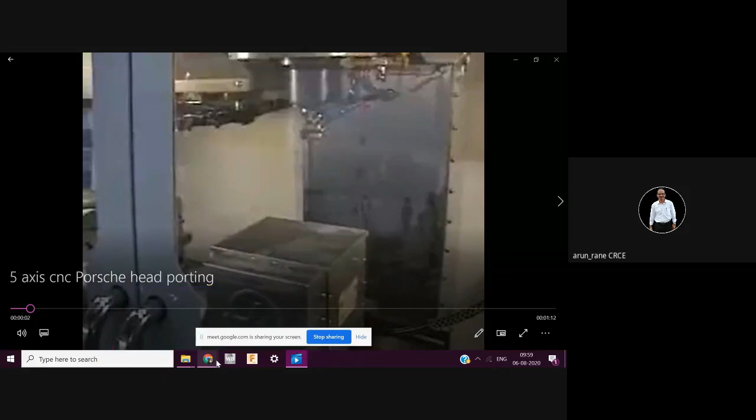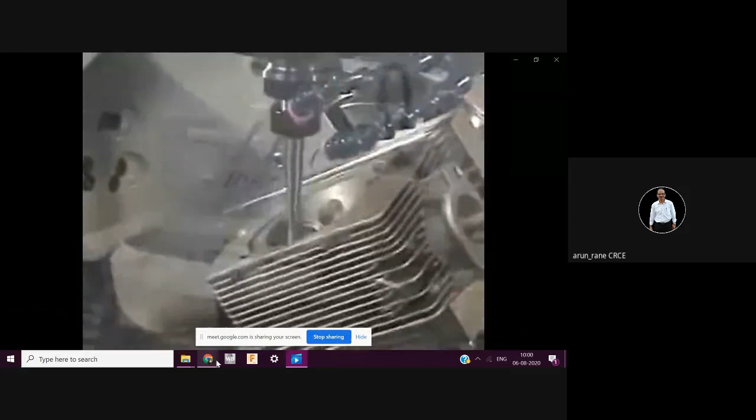This was the automatic tool changer. This is 5 axis machining again. The cylinder head being machined.

This is a long cutter. This cutter is called the bull nose cutter.

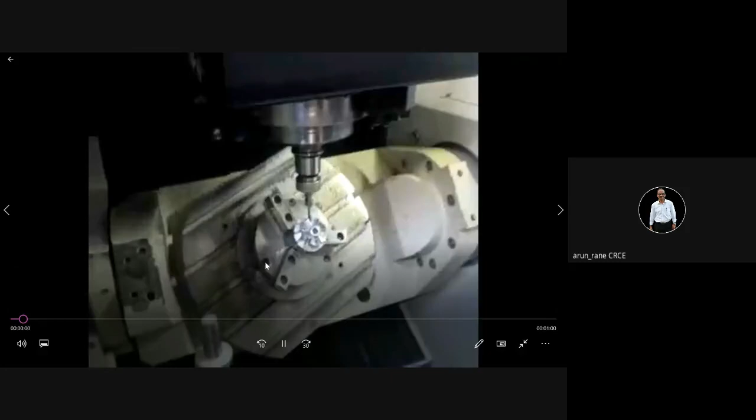I'll show one more video. This is again a 5 axis machining. So that was a kind of an impeller.

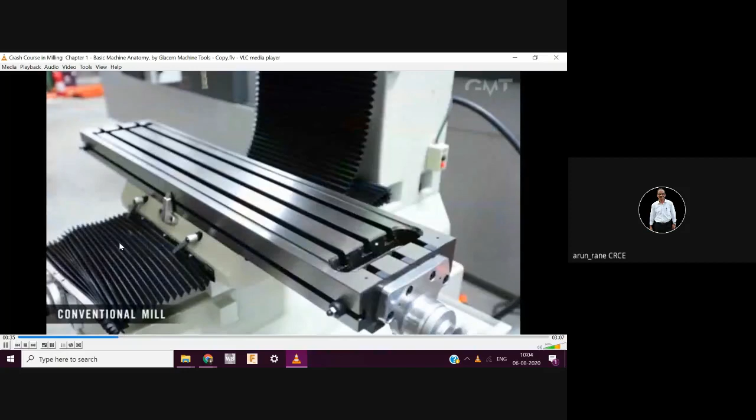See, this is how the workpiece is clamped in the vise. Now three components have been loaded on the machine table. The axis which is parallel to the spindle is the Z axis. This is what your telescopic covers are, made out of rubber just to protect the guideways.

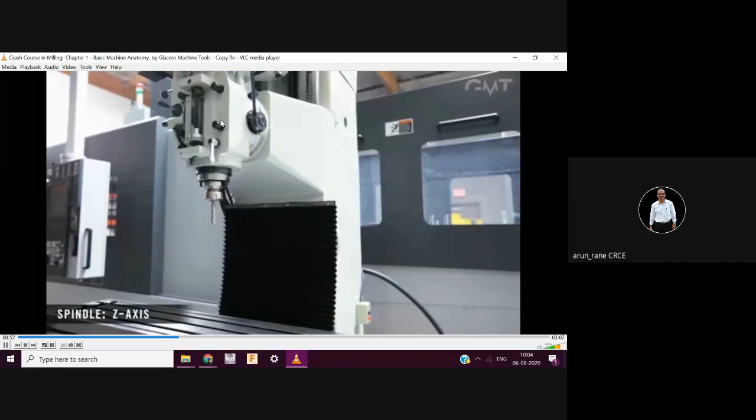The chips will not go inside and it will not damage your slides. The axis which is parallel to the spindle is called the Z axis. This is a 4 flute cutter.

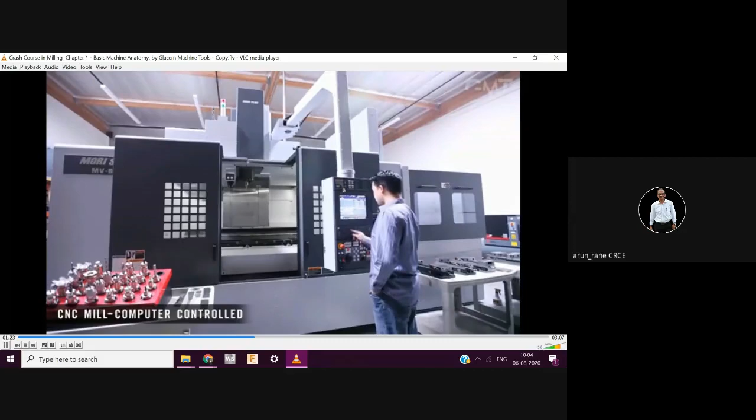This is called the quill. There is a provision that the quill can be handled manually. These are the different tools. This operation is called the face milling operation.

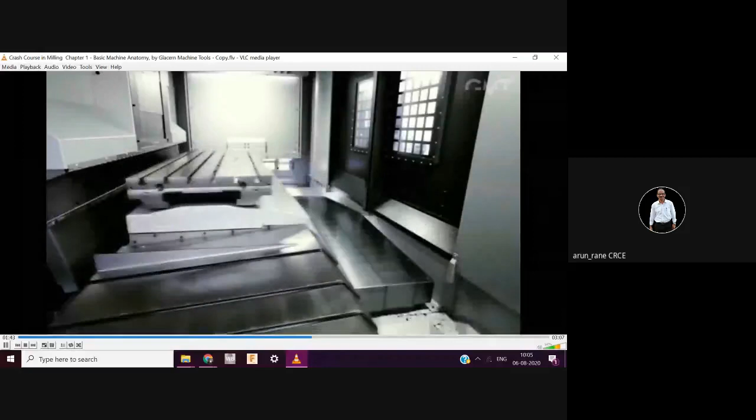The telescopic covers can be made up of rubber as well as sheet metal. These are the linear motion guideways, also called LM guideways or linear motion guideways.

And this is your ball screw and nut. See how free this is - this is for the stick free motion. That is, there is no sticking, so that's why it is called the stick free motion.

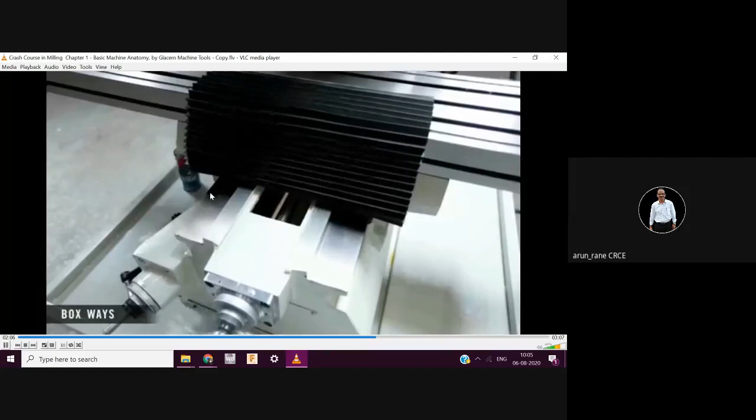These are the servo motors used nowadays. Acme lead screws are not used on CNC machines - it is always a ball screw. But since this is a retrofitted machine, you can see that Acme lead screw. It's always a ball screw and ball nut. Why is it a ball screw? Because the balls are fitted in between screw and nut, so that you get a frictionless motion.

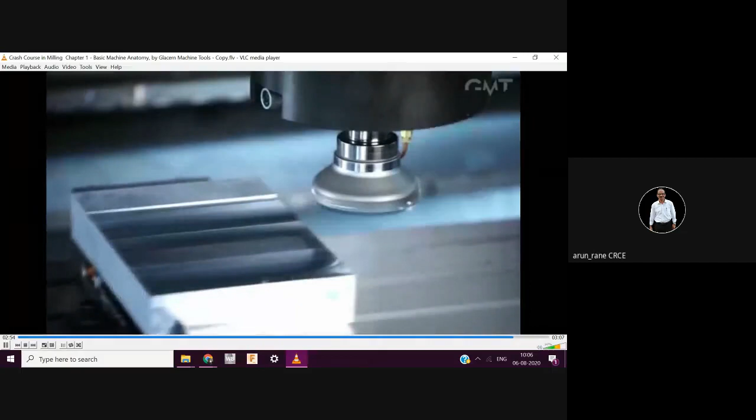This is face milling, and this is the face milling cutter. See how fast it is moving.

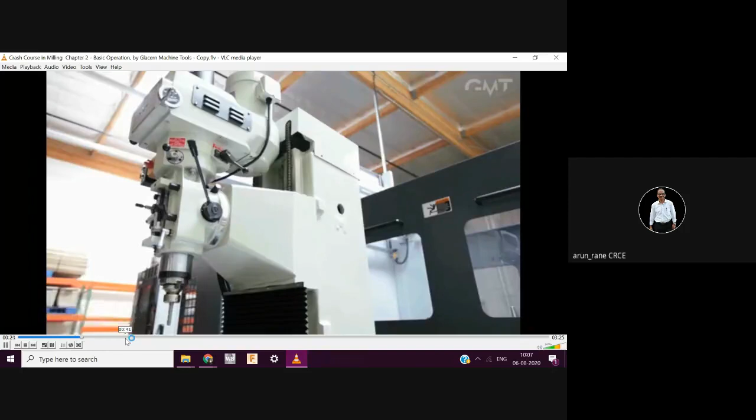These are the different tools. This is how it is fixed. We have draw bar, but nowadays in CNC it is all automatic. This is the manual clamping, which is never done on a CNC machine.

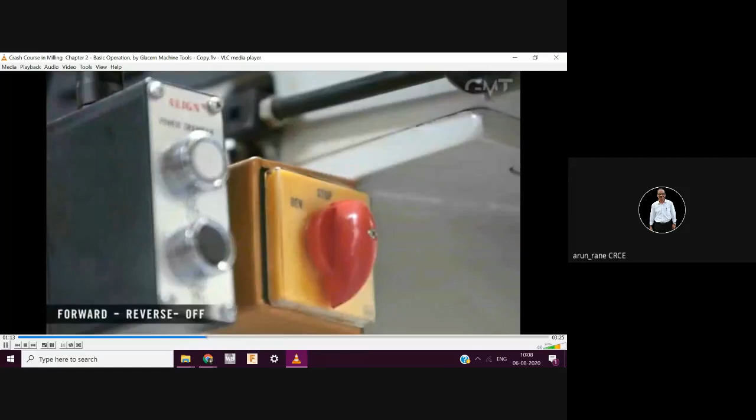This is a 4 flute end mill. The instant reversal - that is forward, then stopping and reversing - is very fast. So that's why we need to use servo motors.

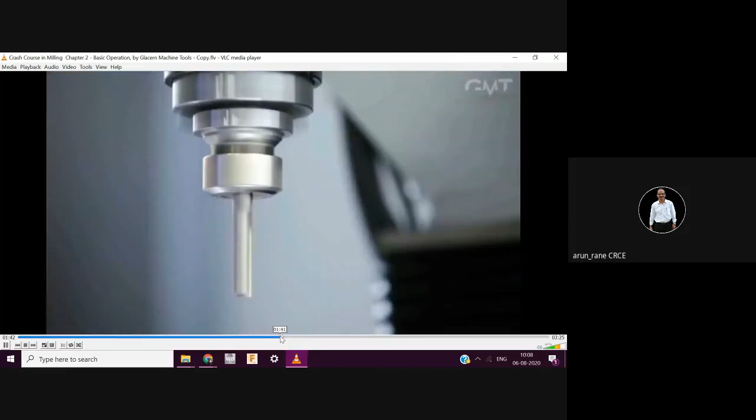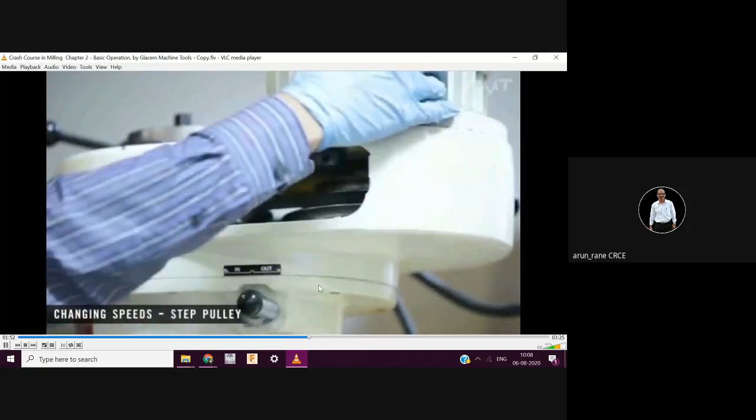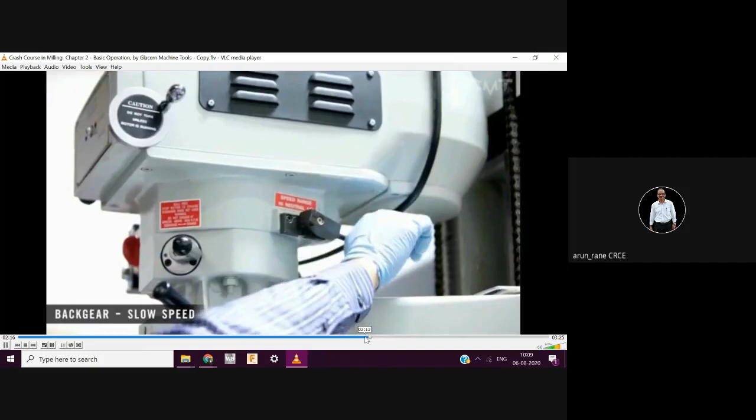Again, nobody uses step pulley in CNC machines. We use a positive infinitely variable gearbox, that is a PIV gearbox. This is manual changing of the gears, which is not part of a CNC.

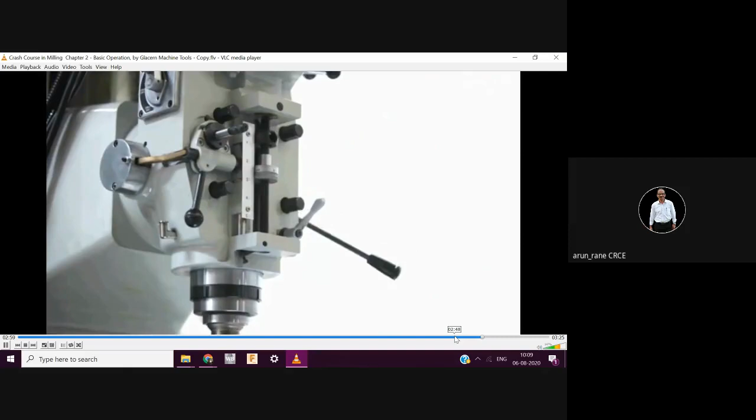This is the auto feed of the clutch for the quill. Of course, this was a manual operation.

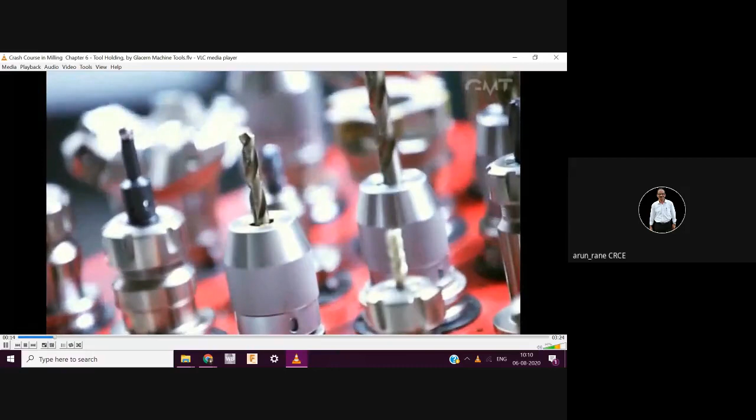So what are the different tools? Without tools, even if you invest 2 crores in the CNC machine, it's of no use. So you have to invest considerably in the tools also. These are the different tools - these are the drills, the coated drills.

These are the end mills. This is a slot cutter, a kind of an end mill. And these are your side lock cutters. These are your drill chucks. This is a drill chuck, which can be without key or with key. So this is the tooling.

You have to invest wisely in the tooling because it is the tool that is going to cut. These are the spindle adapters - usually BT40 or BT50, also called ISO 40 or ISO 50. This is a shank in which it is held, and this is the taper. So this taper should exactly match the machine spindle taper, so that your tool will run true.

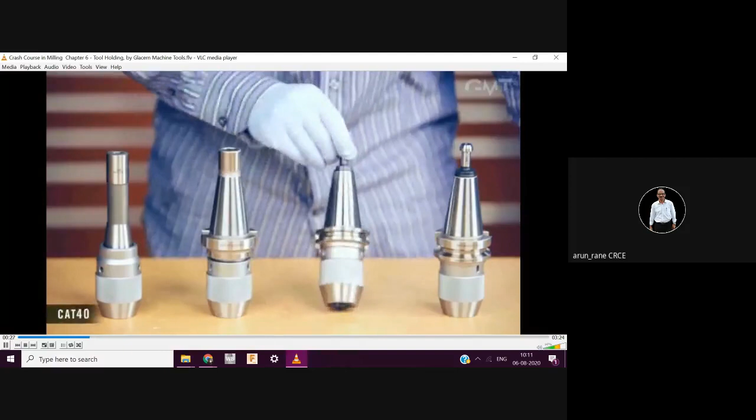This knurling is provided for closing and opening by hand. So these are also called keyless adapters - that is, a key is not required. Again, these are all accessories used for improving productivity.

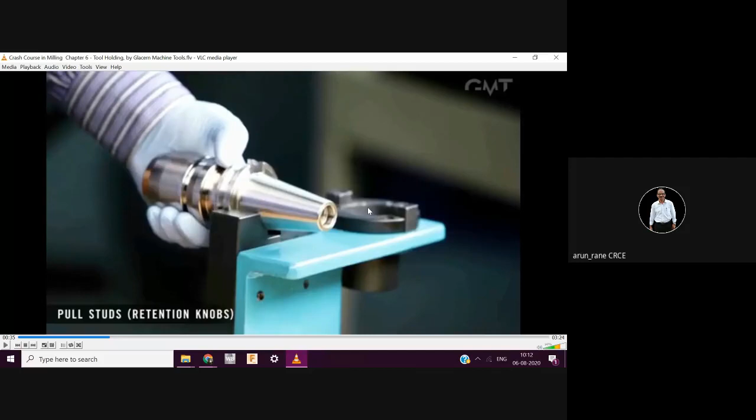So how to fix up the pull stud? This is the kind of picture to fix up the pull stud. This is for the pull stud - you are holding it, this is how a pull stud will look like. It is to be fixed in the spindle.

These are the face mill holders. I'll show it again - face mill holder. See, this is a face mill holder, that is, the face mill cutter is held here. This is the ground body in which the face mill cutter is mounted.

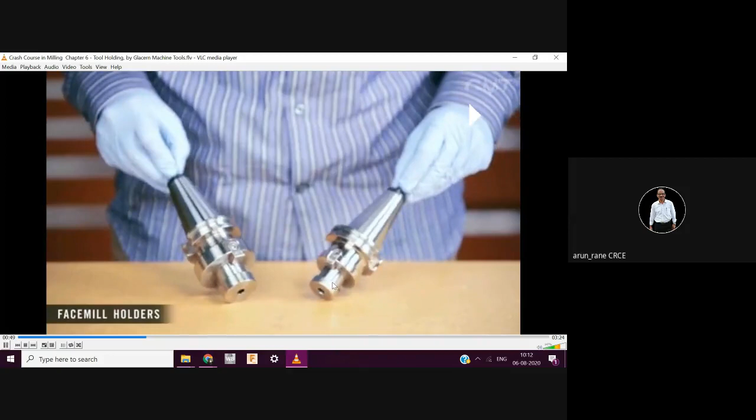So how to fix up the face mill cutter offline? Offline means you are not going to fix up the cutter on the machine. You have to fix up the cutter offline so that your machine productivity increases and your machining time is saved.

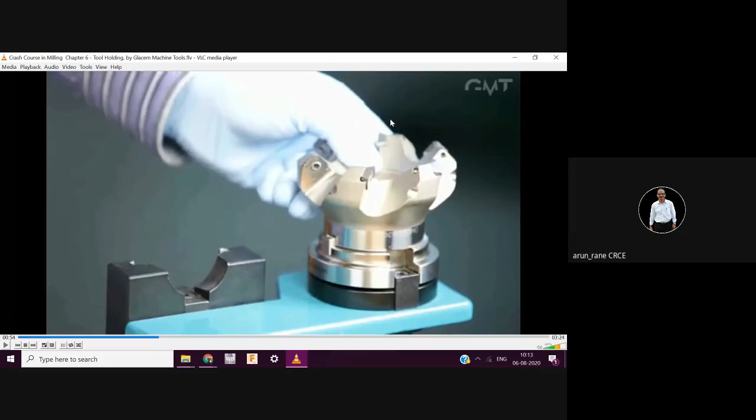These are called side lock holders. Side lock holders means you are holding or clamping from the side. This is a bolt, an Allen screw, which is used for clamping this end mill cutter, and this goes inside the machine spindle.

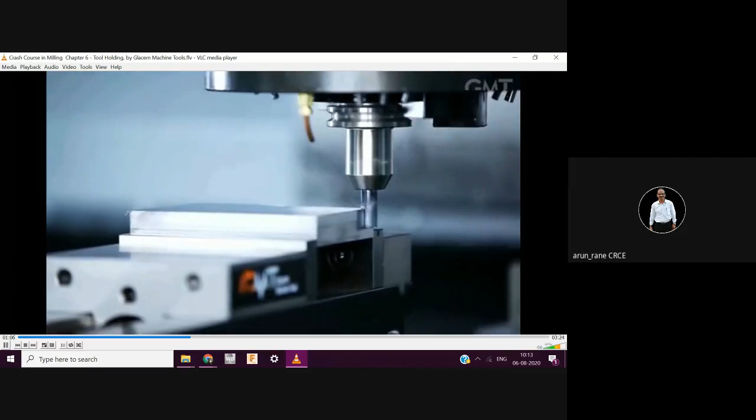This is interpolation, this operation is called interpolation. This is shoulder milling. This is a collet, the collet has a range of 1 millimeter to hold a cutter.

So all this tool setting, we are doing it offline. This is the spanner, a special spanner which is designed and manufactured just to tighten and loosen these collet holders.

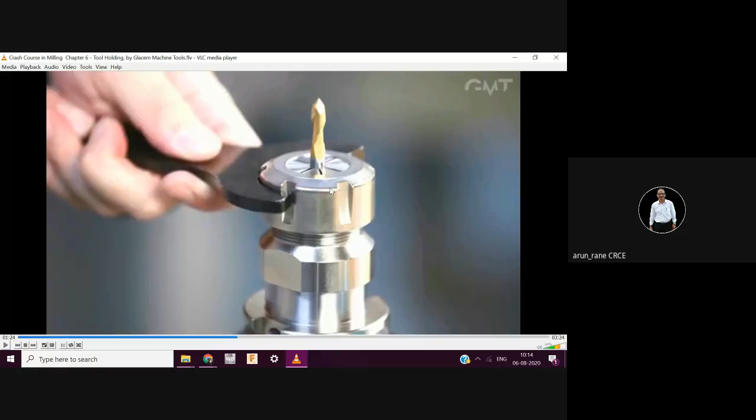That was a coated cutter, titanium carbide coated cutter. This is side milling, which is done with the help of the end mill. This is again a coated cutter, coating of carbide.

This is used for measuring the bore size, or this is also called the touch probe system, which is used for taking the offset. It can be used for measuring the bore also.

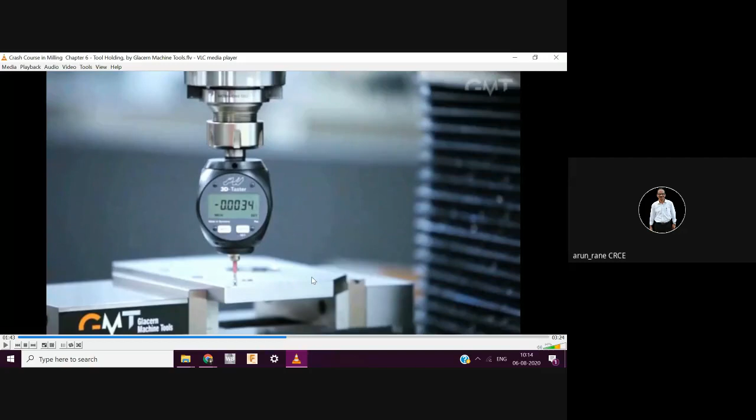So here now we are measuring the Z offset, that is with respect to my machine 0 point, that is Z0 point. Where is the tool face? Where is the job face? With respect to the machine 0 point, that is in the Z direction, where is the face of the workpiece located? The moment it touches, it gives the reading, and then the machine understands what is the height of the workpiece, where is my Z0.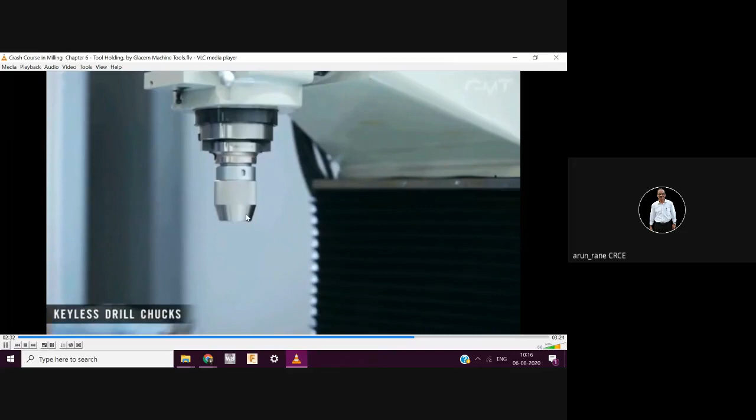See, it is a quick change, keyless drill chuck, so you can quickly mount the tools. Of course, nowadays you use tool changers, automatic tool changers, and pallet changers.

This is for peck drilling. Whenever the drill lengths are same, now this drill length is quite more, so you have to do the peck drilling, which is coded by G83 code, so that the chip should come out of the hole.

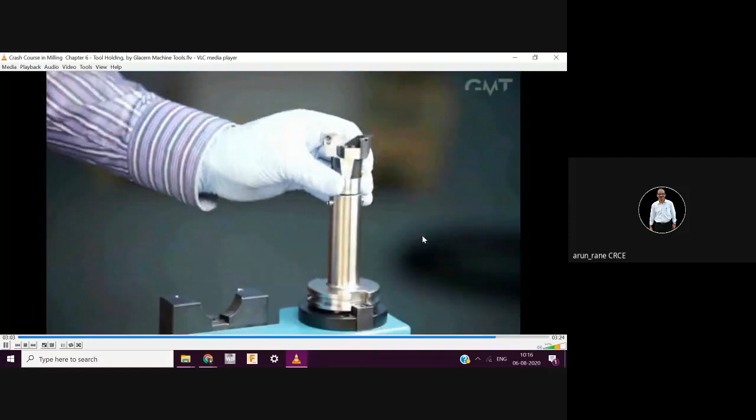This is chamfering operation or countersink. This is again a sort of end mill having inserts.

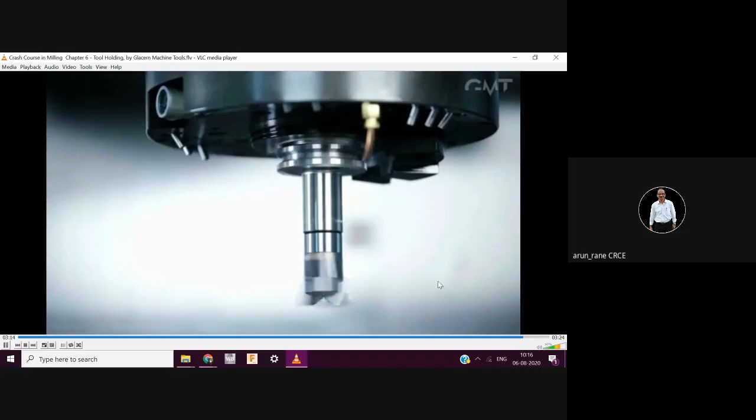Anybody waiting? Let me see. Still some students are joining.

Yes, Mr. Purohit, are you there? Hello? Hello? Purohit is not there? Yeah, Aditya, can you hear me? Aditya Sawant, hello, hello, yes sir. Yeah, you can, I can hear you, somebody messaged me that I'm not audible. What about Purohit, is he not there? Purohit, no, only, his name is... Sagar just joined and left, I think. Sagar Vandra. Sagar? Sagar Vandra, you joined early and left early also. So Neeraj, are you there? Neeraj Jain? Yes, I'm here. Yeah, some students they join and they leave. All right, we'll continue.

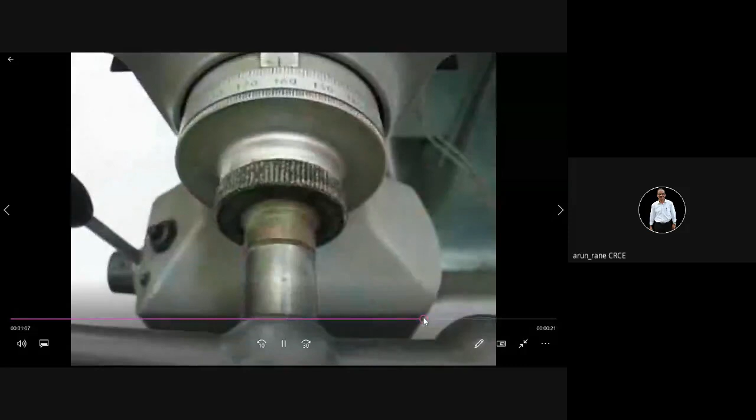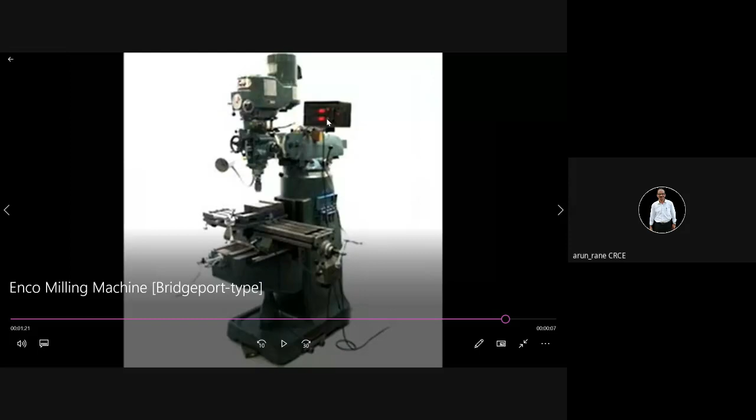DRO stands for digital readout. This is what digital readout is. There is no NC or CNC, it is done manually only, but you have a reading, so it is useful for doing drilling, reaming or tapping kind of operation where there are a number of holes, 4 holes, 5 holes, 10 holes, and when the pitch between the two holes is given, the DRO is convenient. But DRO is not an NC or a CNC machine, it's just giving an indication of where your tool is positioned, that's all.

These are the different operations I will show you one by one, which can be done on the milling machine.

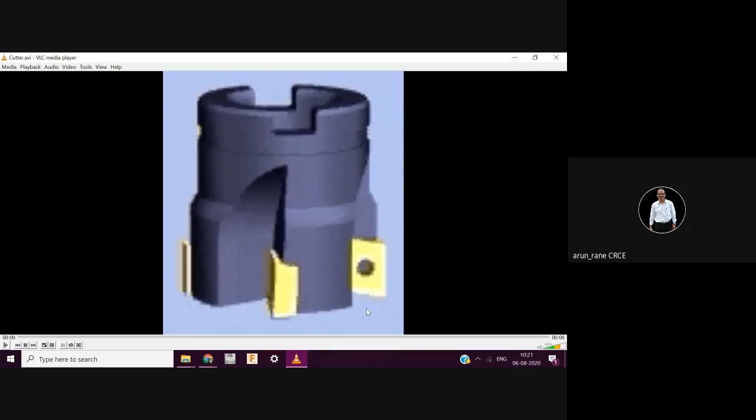So this is called the shoulder mill. Shoulder mill, shoulder mill, it has four inserts, so the productivity is more here with the help of this cutter.

This is for fixing in the spindle. This slot, what you can see, is used for fixing up in the spindle, as well as you have a bore also, which is ground.

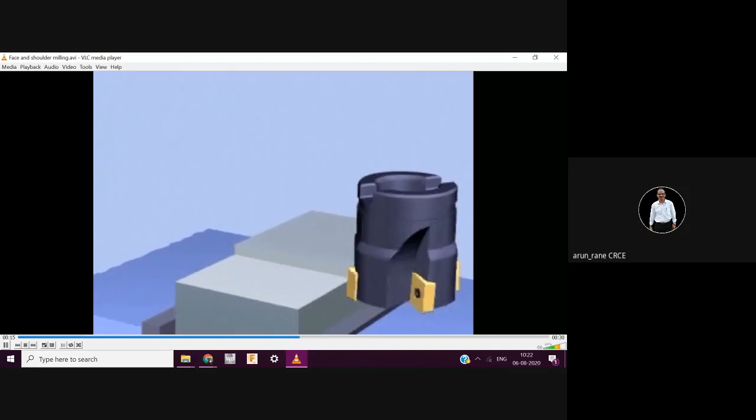This is a face and shoulder milling operation. Shoulder means this 90-degree face you can see - that is what is called the shoulder. Many times students are not aware what is face milling and what is shoulder milling, so that's why I'm showing this. Those who have practice are already aware of these different operations.

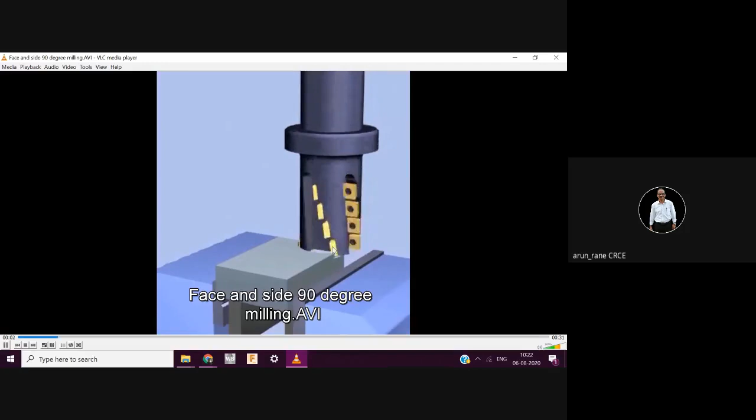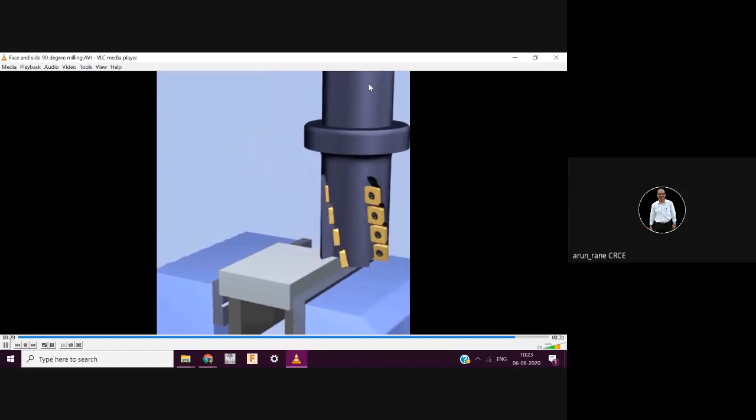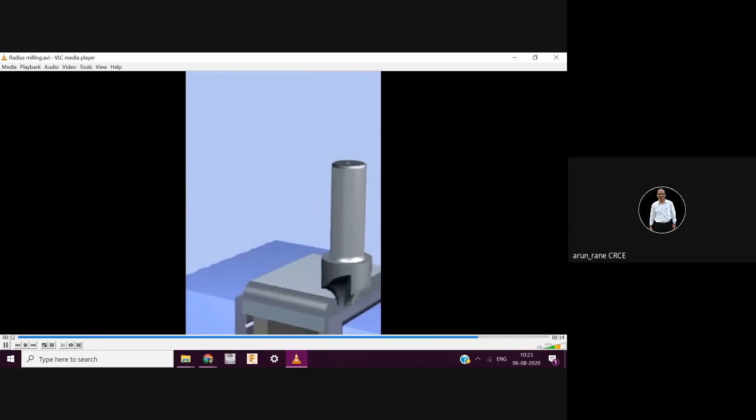This is again a stagger type cutter. You have almost 16 cutters. Whenever the depth of the shoulders is high and material removal rate needs to be more, you go for this type of cutter. It's a bit expensive because there are 16 inserts, each costing around 300, plus the holder costs around 6,000. But the returns are good, in terms of reduction in machining time. So you have to have a trade-off on how much to invest in the tools. If we have mass production type jobs, then definitely you need to invest in the tool.

This was the form milling, that is radius milling operation. The radius which is required on the workpiece has been ground on the tool. Again, if the quantity is more, then only we go for form milling cutters.

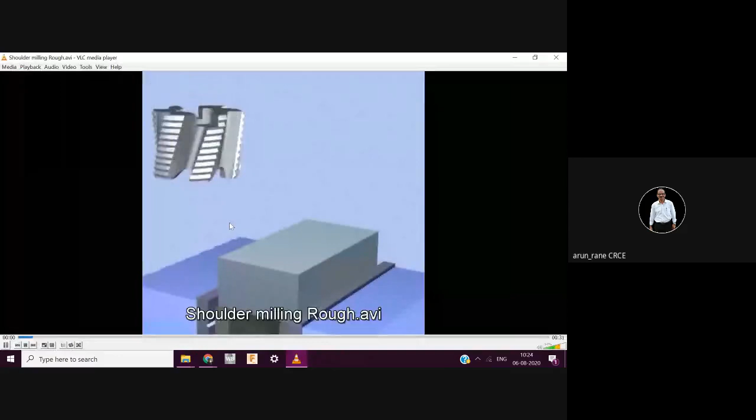This is called the shoulder mill, or it's also called the shell end mill. This is used for shoulder milling, but it's a rough milling operation. You'll see chatter marks or a rough surface, so this has to be followed by finish milling. The advantage is that the cutting is fast and the material removal rate is high.

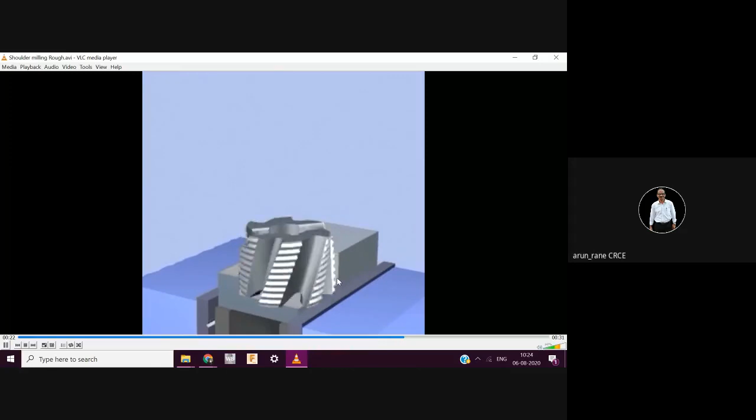Again, this is a solid cutter. Solid cutter means the tips are cut in the body itself, there are no inserts. This is done on a vertical milling machine - the spindle or arbor is vertical on which this cutter is mounted, and this is for the slitting cutter or slit milling operation.

This operation is for slit milling or even slot milling. The difference between slit and slot is that slot is wider, whereas slit is narrower. Slits are usually 3 mm and less than 3 mm, and if it is more than 3 mm, then we call it a slot.

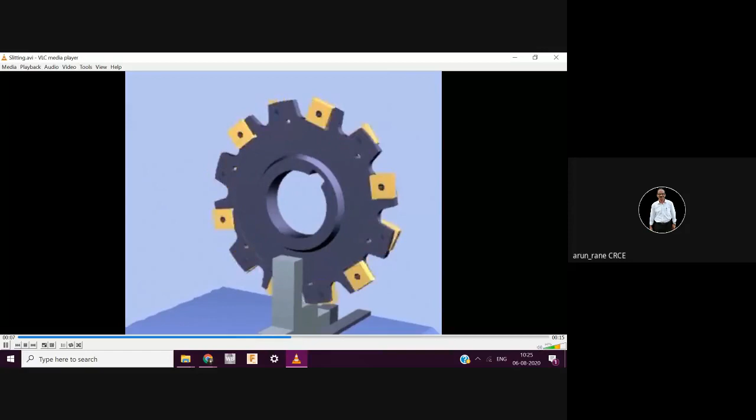This is a horizontal milling machine because the cutter arbor is horizontal - you have to look at the bore. This is slot milling, a 12 dia slot milling.

This is a coated cutter, carbide coated cutter. You can take the depth as long as you can see the flutes - your flute should not be covered up. And even if it is covered up, there should be provision to remove the chips, otherwise your cutter will break.

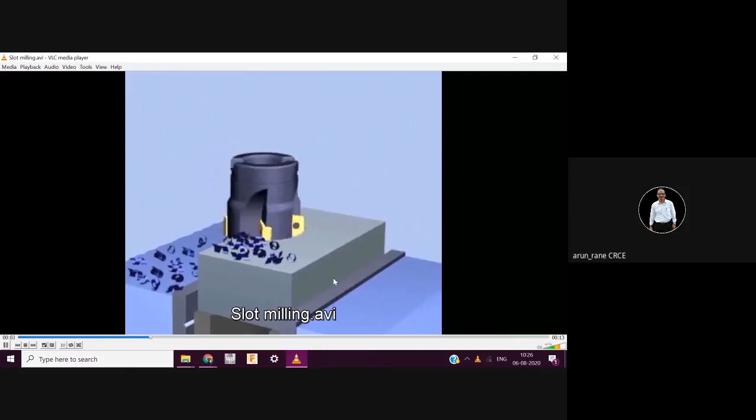Again, you have slot milling. As I said, you have to differentiate between slit and slot - slot is nothing but a kind of slit which is wide.

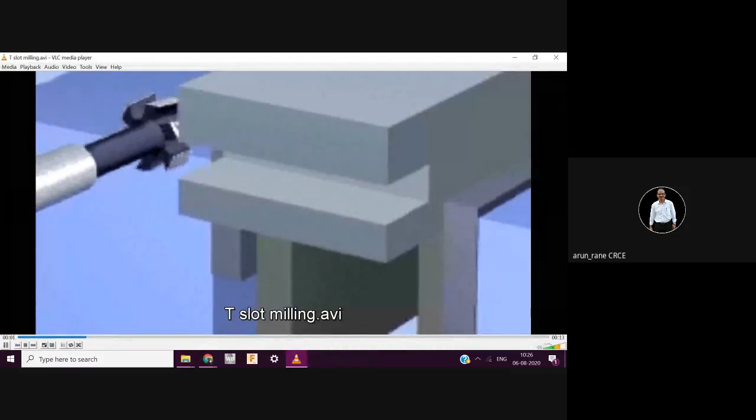This is a T-slot operation. T-slot - you must have seen on the tables such kind of T-slots, so you can insert the bolt. What is the purpose of T-slots? It doesn't rotate - the T-bolt doesn't rotate.

This is your angle milling cutter, a V milling cutter. We also call it a double angle milling cutter. You can have two angles simultaneously, or you can have just one angle.

Anybody wants to join? Let me see. Nobody. Nobody is in the waiting room. Nobody is in the lobby.

So let's start with the CNC programming.

There will be around 20 marks out of your 80 plus 20 plus 20, so out of your 140, 20 marks plus 20... so 30, out of 140, 30 and sometimes up to 40 marks are for the CNC program. How is it divided? One program for CNC lathe, one program for CNC milling - that's 10, 10, 20 - and then one program based on APT. If the workpiece is complex, then it can be 15, 15 plus 10, but minimum 30 marks will be there. How minimum 30 marks? 10 marks for CNC lathe program - I'm talking about the theory question paper - 10 marks for CNC milling program, and 10 marks for APT program. So like that, 30 marks minimum is the weightage for the CNC program.

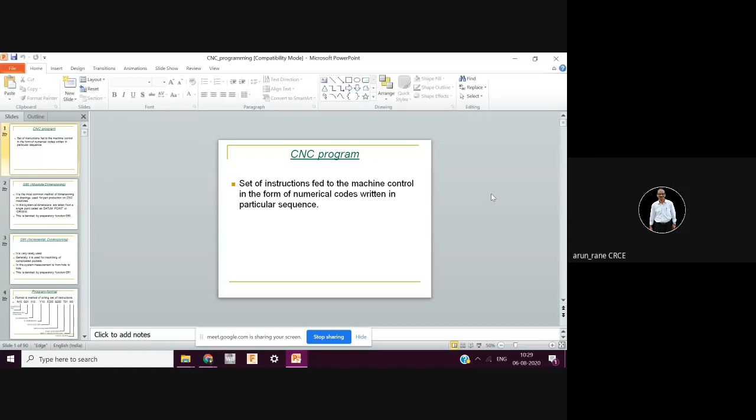So what do you mean by this CNC program? It's nothing but a set of instructions which is written in some high level language.

This is a set of instructions written in high level languages like English, which can be understood by the operator or the engineer. This high level language is converted into 1010, that is machine language, and that is called binary calculation. This 1010 is nothing but machine language, which is the on-off signal: one for high, zero for low, one for on, zero for off.

These are low voltage signals, and these are amplified. The amplified signal, from say 10 volts to 230 volts or 420 volts, is given to the respective servo motor, and the servo motor runs. This is how it works.

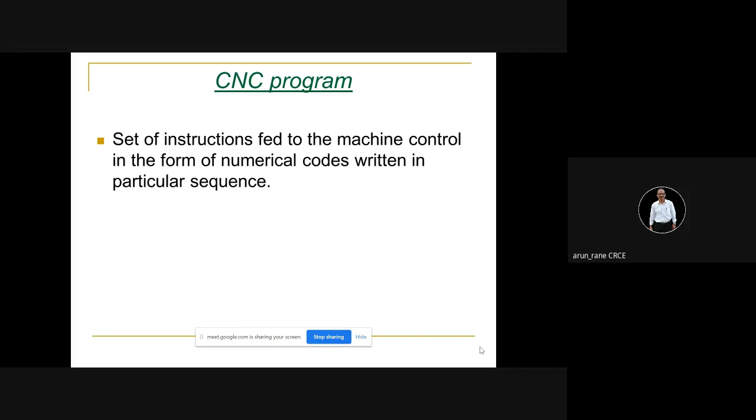The codes used in the CNC program are called preparatory codes, because these codes have a dedicated function. Like if you use G90, it means absolute. If you use G91, it means incremental. So this is the first code you should learn, that is G90, which is for absolute dimensioning.

I already briefed you many times: the dimensions on the drawings are given with respect to one reference point or one fixed point. That is what is called absolute dimensioning. So depending upon the drawing you receive, you have to use the appropriate code.

If the dimensions are given with respect to the previous point, then you have to go for G91, that is for incremental programming. So you have to take a decision accordingly, whether to go for G90 or G91. That totally depends upon the drawing.

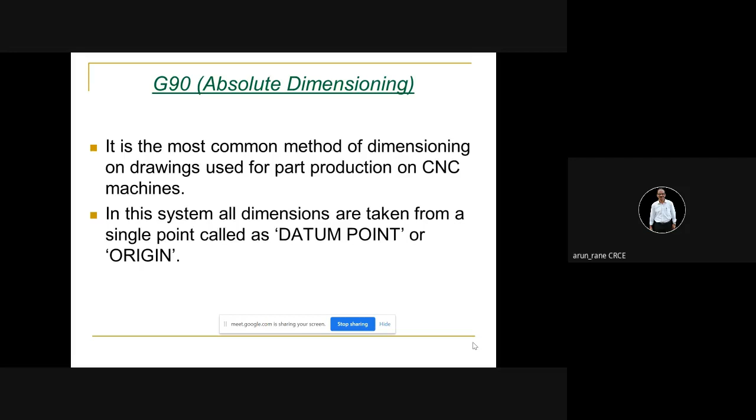All the dimensions are taken from a single point, called the datum point, also called the origin, the reference point, the program zero point, or sometimes the workpiece zero point. There is a small difference: the fixed zero point generally refers to the machine reference point. The program zero point is the reference point taken by the programmer on the workpiece. The workpiece zero point is when you use a touch probe system to take a reference point on the workpiece, so it can be same or different.

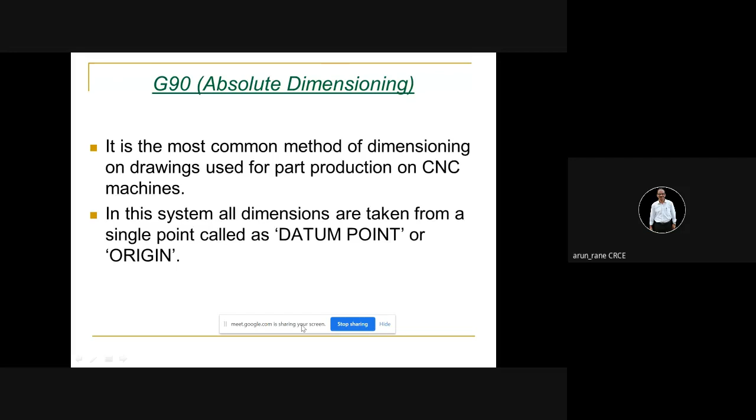G91 is not commonly used, and generally it is used for repetitive tasks. G91 incremental dimension is when the dimensions are given with respect to the previous point, so it is called incremental dimensioning, and the code used is G91.

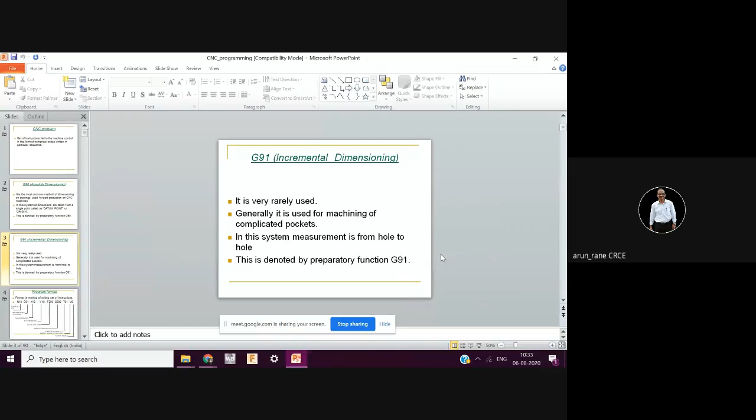So how is the format of the program? The format is how you write the set of instructions; you have to follow a particular protocol. This entire thing is called a block.

The block is identified by a character called the end of block, which is missing here, not shown here. This is because the end of block is represented differently on different controls. For example, if I am using a FANUC control, I use a dot or a full stop.

If I am using a Siemens control, then I use a star, also called an asterisk. So a star or asterisk means the block is completed.

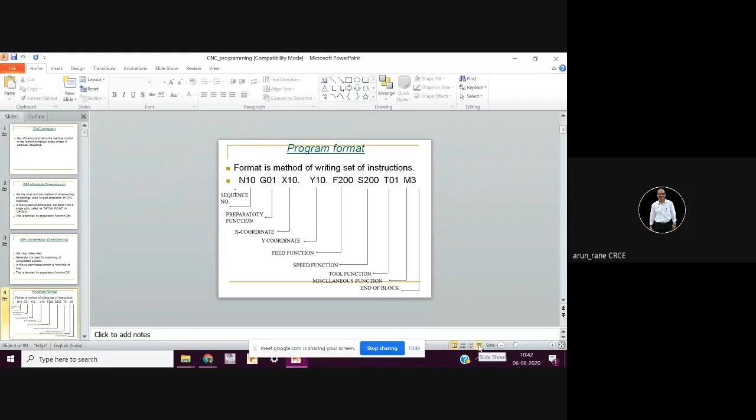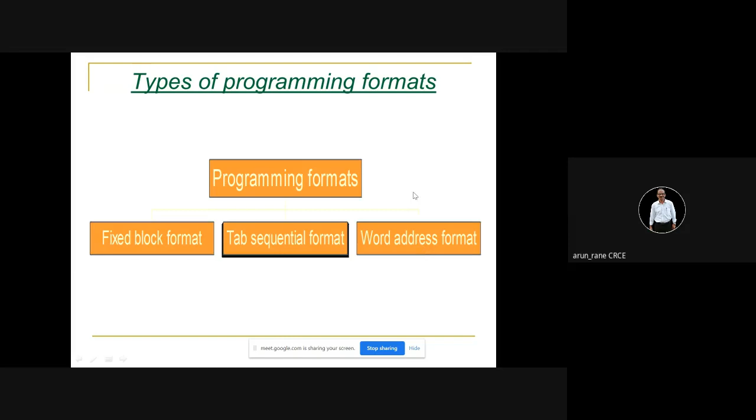Format is nothing but a method of writing a set of instructions. What are the types of programming formats? You have fixed block format, tab sequential format, and word address format. Generally we use the word address format. Whatever I showed you just now, that was the word address format.

Let's see what fixed block format is. Here the instructions are given in the same sequence, one below the other, column by column. All instructions must be given in every block, including instructions which remain unchanged from the previous block. Like, suppose in the previous block you have given G90, and in the next block you again want G90, then you have to give that G90 again. It's not that since I already did G90 before, I can skip it. So that is what is called modal and non-modal.

Modal means it remains effective till it is replaced, and non-modal means it is effective only for that particular block. For example, G04, is that a modal code or non-modal code? It's a non-modal code, it remains effective for that particular block only. G01 is a modal code, it remains effective unless and until it is replaced or unless the control reads another code. So G01 will remain effective. But in fixed block format, you have to repeat it, so it behaves like a non-modal code. Every block you have to repeat the code, even if you gave that code in the previous block.

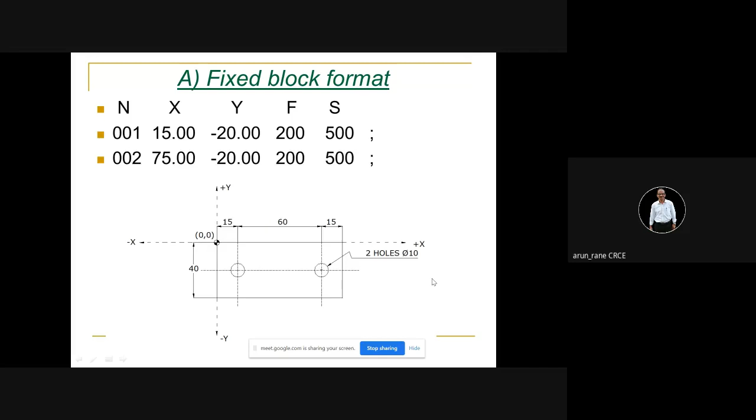Now let's study tab sequential format. It's the same as fixed block format, but each word is separated by a tab character. Here it is not required to repeat the instructions given in the previous block, so it's kind of a modal — no need to repeat, it remains effective until you need a change.

For example, if you've been using G01 for say 10 blocks, and now in the 11th block you want to change it to G00, then at that time you have to write G00. That G00 will remain effective until it is replaced.

So again, same example, we'll take tab sequential format. You have to have a tab in between two words — this is for one word, just the word, word, word, word. So you have to press tab between two words. The only advantage is that you don't have to repeat the previous code if you are going to use it.

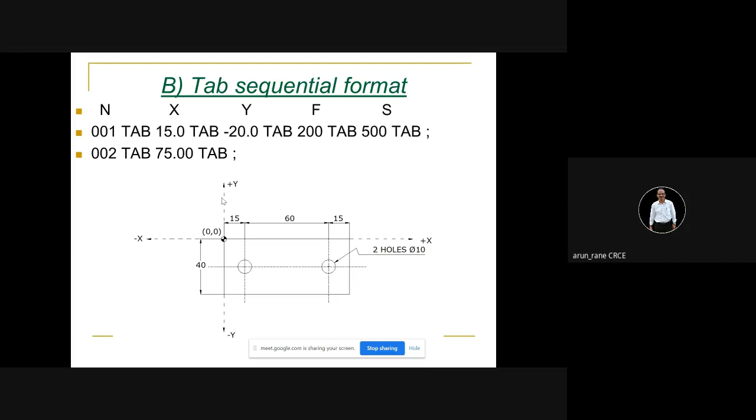And earlier, what was it before? Fixed block format — in fixed block you have to repeat the code, you have to repeat the code. Generally we go for word address format.

We go for word address format. This is the most popular format. Here you can use any word, A to Z, which was the limitation in the earlier two formats. Any word can be used, A to Z, 26 alphabets. All the words will be recognized, A, B, C, D, anything. Then it is followed by some number, 0, 1.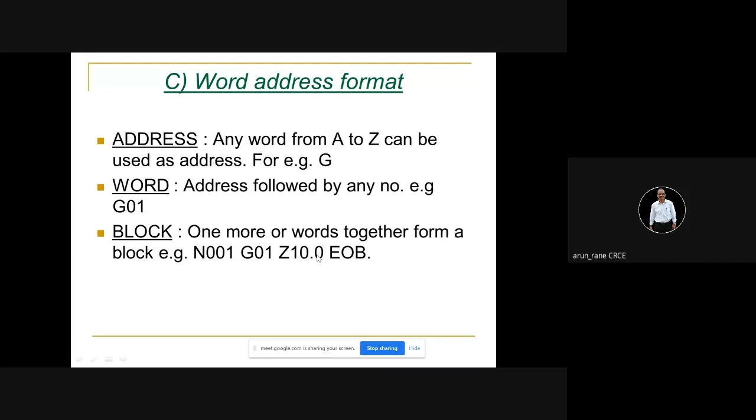Then one or more words form a block. So N001, G01, Z10.0, and end of block. End of block is nothing but a point like this, or it can be a star, depending upon the type of control being used. Then again, if the word remains unchanged, it is not necessary to repeat it. That depends on whether the code is modal or non-modal.

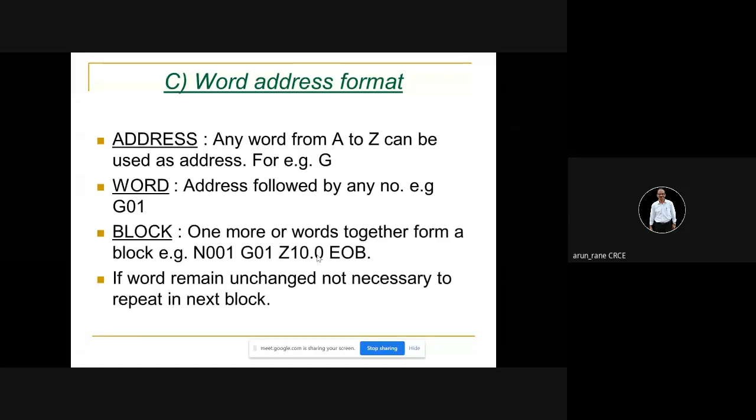Alright, so what are the different functions and addresses? Program number is usually denoted by O. But again, depending upon the control, this changes - some controllers use P for the program. Sequence number is N - it is common to all controls. G for preparatory functions, that is also common.

X, Y, Z, A, B, C, U, V, W - these are for the axis, and that remains common. R stands for the radius, that is again common. I, J, K stand for the center point of the circle. Whenever you want to do circular machining, you have to define the center point of the circle in three dimensions - like if it's a 3D helical kind of thing which you have to machine, you have to define the center point in all three axes. So that center point defining is done by I, J, K - you have to give those dimensions, represented by I, J, and K.

For feed function, it is F. For speed, it is S. For the tool, it is T - easy to remember, it's taking the first letter. For miscellaneous functions, it's M - sometimes some controllers also use D. Then there's offset, like tool offset - tool diameter offset and tool length offset - shown by D and H. Generally D is used for tool diameter offset, and H is used for tool height offset. H for height, D for diameter.

Then you have dwell. Dwell means the machine's spindle will remain on, but the feed motion, that is the axis motion, will come to a halt for a particular time which you define by this letter. Like suppose if I say P2000, that means the machine will halt for 20 seconds - that is, you have to divide by 100. Again, in some machines, it is taken as 2000 divided by 1000, that is 2 seconds. So you have to go through the programming manual for your program. In Fanuc, the dwell is defined by P. In case of Siemens, the dwell is defined by X.

Why is this dwell required? Suppose you have done a reaming operation, and the reamer has gone till the end. Now, before you retract the reamer, what do you do? You allow the reamer to rotate for some amount of time, maybe 5 seconds, in order to get a good finish. It's something like finishing a cut - against a finish cut you take, say, 3-4 idle passes so that you get a good finish. Same thing here - you allow the cutter to rotate so there will not be any chip cutting, it will always be a fine cutting to get a good finish.

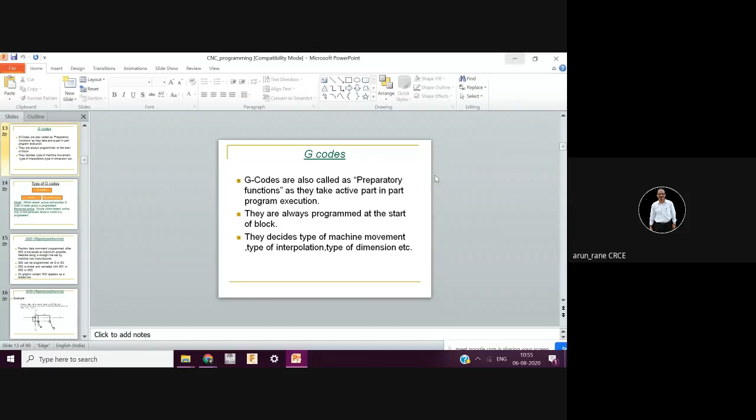Now let me see how many students are present.

Neeraj, are you there? Yes sir, I'm here, I can hear. Can I take a roll call? Yes sir, you have to just say present or absent.

So Abhishek, be fast because there are only 5 minutes, otherwise your break will reduce. Abhishek.

Aditya Chavan, absent. Aditya Kamble, present sir. Aditya Ombalkar, absent. Aditya Punjabi, absent. Aditya Sawant is present.

Akash Jadhav, present sir. Amit, present sir.

Sir, in July you marked me absent, but I'm always present in all your lectures sir, I am not absent. Who, in July? Sir, Aditya Sawant.

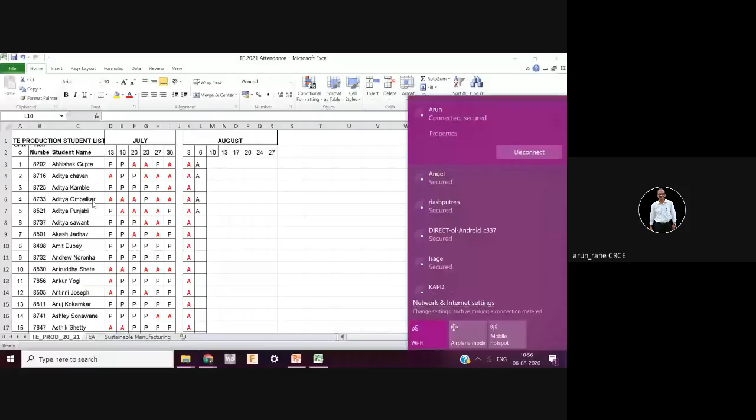There was a confusion because there were too many Aditya, no? So I'll mark you present because you're here. All the lectures I was present.

Okay, I'm marking you present in front of you only. Later on I'll make it, I'll change the text color, because there was a confusion, no?

There were so many Aditya and I was able to see Aditya only, and I had appealed for that. In fact I had highlighted, I removed this. Akash is present.

Amit Dubey, absent. Andrew, present. Aniruddha Shete, present. Ankur, Antony.

Kokamkar present. Ashley is absent. Shetty, absent. Colaco, Pereira, Asthik is present.

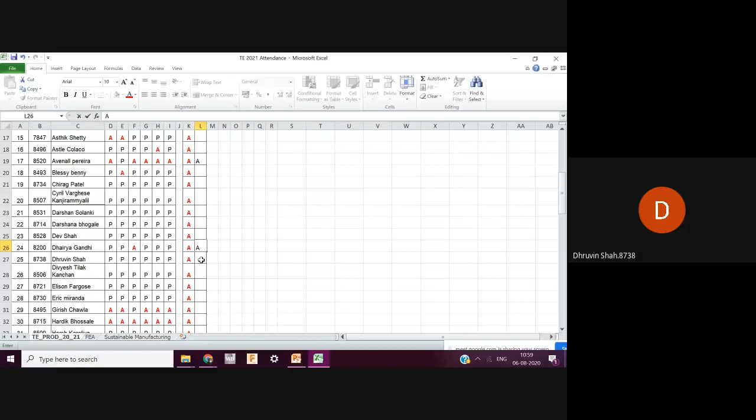Erik, present. Girish, Hardik, both are absent, sir.

Okay, now here. Now there is always a confusion of Raj, Raj Babulal.

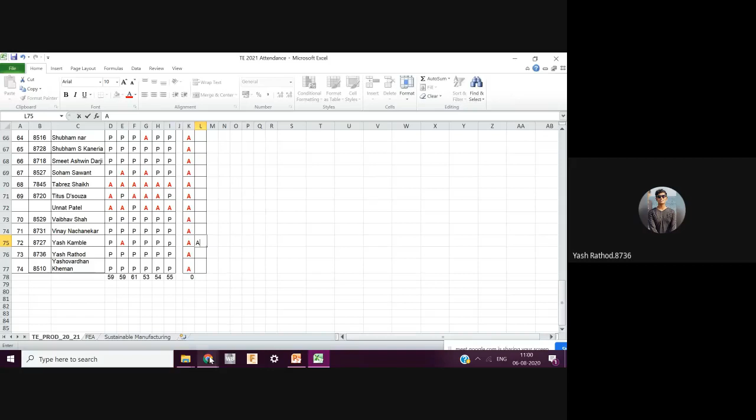Yash Kamble. Yash Kamble, absent sir. Yash Rathod, sir present. Yash na, yes sir, Rathod. Yash Rathod is present, Yash Kamble is absent.

Okay then, 8526, sir could you check 8526? 8526. 8526. What is the serial number? Serial number, Sheldon, 8526, now what is the serial number?

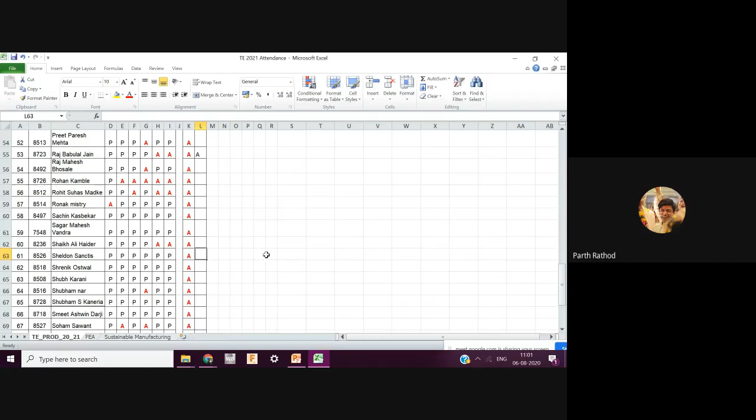Sir, even I am present. Parth Rathod. Yeah, I will check. Rest of the things I will check from the attendance list, because there is always confusion about Aditya and Raj, you know.

Sir, Sagar here, attendance. Vaibhav Shah, sir, I was present in the last lecture. Sir, I was present in all of your lectures. Sagar Vandra, 7548, present in last lecture. Tell me the serial number.

Sir, can you scroll down? Scroll down. Serial number 59. Sagar Vandra, hey Sagar you join and then disappear.

Sir, network issues. Today you joined at 9:50 and then I was trying to talk to you. Sir, my laptop got shut down, battery issue. And then I rejoined. Okay, what is your concern?

Sir, even I am present, 8529, Vaibhav Shah, I was present in last lecture also. That will be right, that will come in the attendance list, don't worry, I'll show you next time.